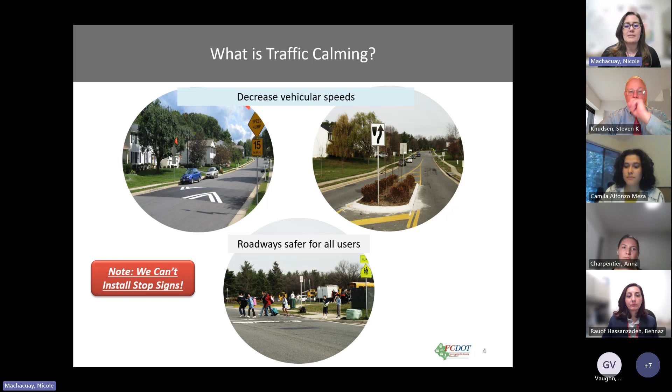Here we have a countywide map showing that within traffic calming, we have over 200 projects resulting in 500 devices countywide. Every district has devices, and the chances that you have driven over one are pretty high.

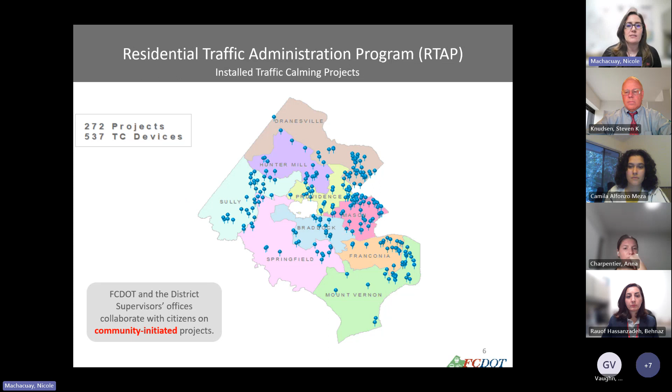The program can be broken into 5 steps. Step 1 is project initiation. Step 2 is plan development. Step 3 is community engagement. Step 4 is the ballot phase. And step 5, the final step, is project installation.

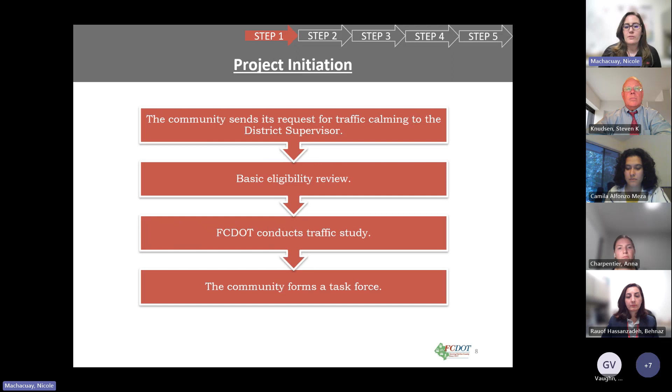As I mentioned earlier, all traffic calming projects are always community initiated. The process begins with a request from the community to the supervisor's office. Once the request is received, we will first complete an eligibility review. Next, we'll conduct a traffic study. Once it passes both the eligibility review and the traffic study, the community will then form a task force.

There are eligibility requirements that need to be met. Number 1, it needs to be a VDOT maintained road. Number 2, it needs to have a 25-mile-per-hour speed limit and be functionally classified as local, collector, or arterial. And if it's collector or arterial, it needs to meet a residential street.

There is also a traffic study component. Here we have traffic study results for Forestville Drive. For the volume criteria, we need between 500 to 6,000 vehicles in 24 hours, both directions combined. For this project, we had 543, so we met the volume criteria.

For speed criteria, the 85th percentile of speed needs to be greater than or equal to 35 miles per hour. This means that 15% of vehicles need to be traveling 35 miles per hour or faster in at least one direction of travel. On Forestville Drive, we found 39 in the northbound lane and 40 in the southbound lane, which means Forestville Drive met the speed criteria as well.

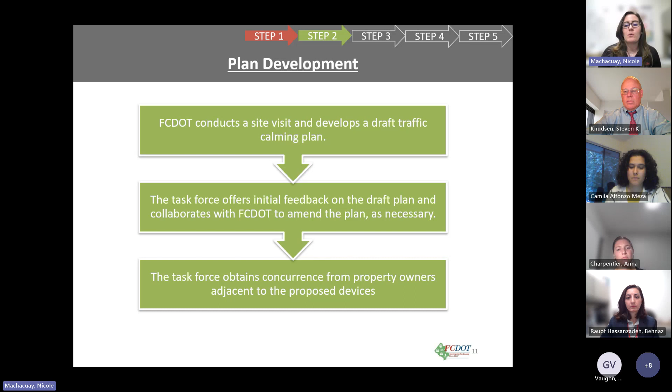Plan development is the second step. First, we will conduct a site visit in the field in order to develop a draft plan. Once we have a draft plan, we will meet with the task force to get feedback and then amend the plan if necessary. Once the task force is satisfied with the draft plan, homeowners directly adjacent to any proposed measures will need to sign off on the placement of the device for the next step to happen.

Here we have device placement requirements. Based on the guidelines, we need a minimum of 300 feet between measures and existing stopping conditions. We need a minimum of 150 feet from any intersection, a minimum of 150 feet for adequate sight distance with any device, and it needs to fit on the existing roadway. So we need to take into account any driveways, manholes, or utilities, and we also need to account for the grade of the road.

Based on those requirements, we were able to draft a plan and propose 2 speed humps and 1 speed table, as you can see on the map here. Once again, the addresses listed are the ones that signed off on the devices because they are adjacent to their homes.

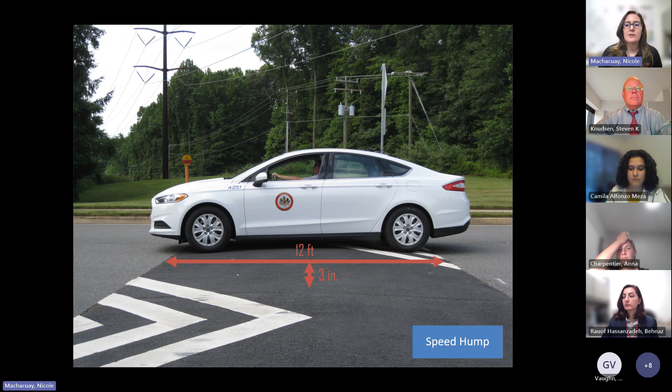Okay, so here we have a graphic of a speed hump. It's going to be 12 feet long and 3 inches at center. In addition to the speed hump, there will be a speed hump sign and the recommended 15 mile per hour sign on each side. There will also be white chevrons on each travel lane.

Here we have a graphic of a speed table. It's going to be 22 feet long versus the 12 feet of a speed hump, and 3 inches high at center. In addition to that, there will be a speed hump sign and the recommended speed of 15 miles per hour on each side. There will also be 2 white chevrons in each travel lane.

Okay, so step 3 is a community meeting, which is where we are here today. This is where we present the plan to the community to obtain feedback. Based on the feedback, the task force will decide whether they want to amend the plan or proceed to the next step. If the task force decides to move forward, we can move forward to the ballot phase.

Each household in the ballot area will receive 1 vote. They will need to send it directly to the supervisor's office. The ballot period will be open for a minimum of 3 weeks, and the supervisor's office will tally the votes and notify the task force of results.

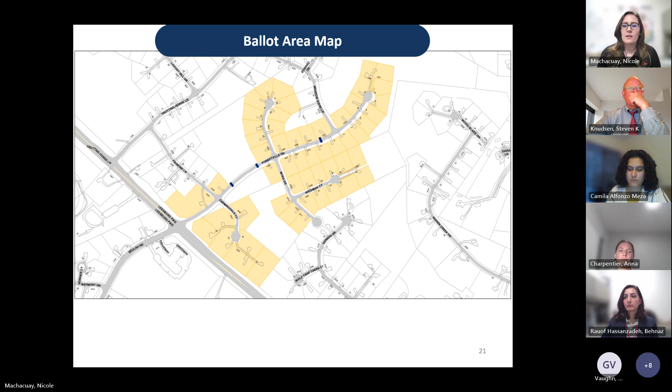Here we have the ballot area map for Forestville Drive. So there are 54 ballots. In order for the proposed plan to move forward, we will need greater than 50% of all households to vote in favor, so we will need a total of 28 yes votes.

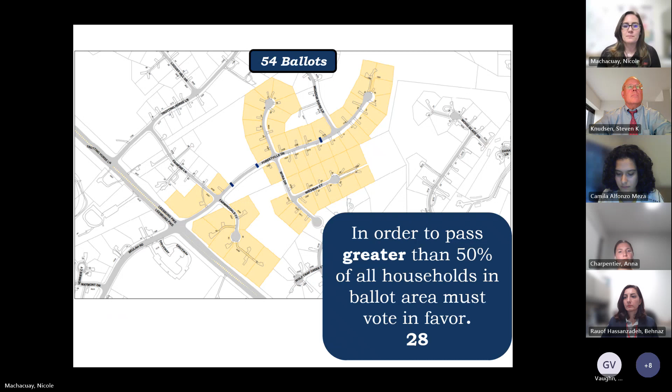If we get the required number of yes votes, we can move on to step 5, which is project installation, the final step. So the traffic calming plan will be presented to the Fairfax County Board of Supervisors for endorsement. Then that resolution will be sent to VDOT. VDOT will work with the Department of Public Works and Environmental Services to schedule installation. And finally, the traffic measures on the plan will be installed.

And here is the end of the presentation.

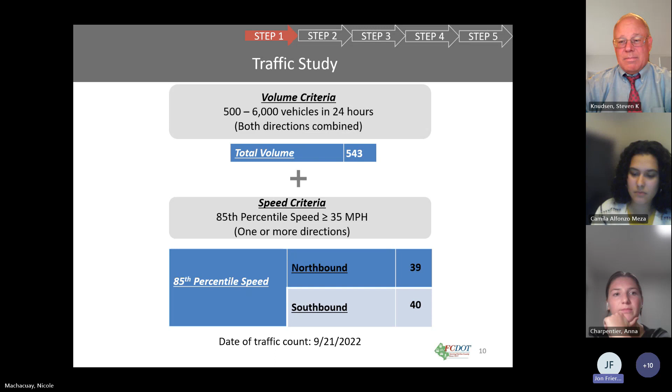First of all, I want to comment on the thing we've been talking about. I've lived here 30 years, and most of those years there have been clear speed limit signs on these roads. I was a little surprised to hear that only 40% of the people are speeding over 35, because people have been speeding through this neighborhood for decades. So I don't think taking the sign down or putting another one up is going to make much of a difference.

But my original question was, is there any sort of follow-up thing? I know that people in this neighborhood don't always respond to requests. Is there just the one mailing, or is there any kind of follow-up or reaction?

When the ballots go out, we'll generally leave that ballot process open for approximately 3 weeks. You can reach out to the supervisor's office, and Camila should be able to tell you how many have come in. Then it would be something the task force would need to do, to send out a reminder to the people that received ballots that they still need to vote. We can't necessarily let you know what addresses we've received ballots from, but we can tell you the total that we've gotten back. So if it seems like the return is lagging, you can send out some kind of communication asking people to participate if they have it. Okay, that sounds great. Thank you.

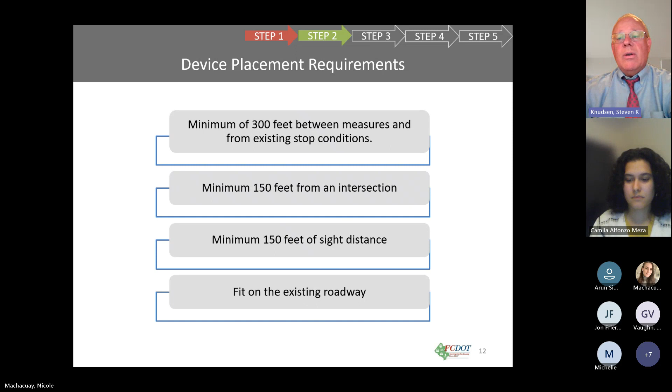All right, thank you, Arun. We were looking at the area between Farmingdale and Route 7. Unfortunately, we didn't have a long enough length of roadway to propose any measures in that area. I think when Nicole was going through her presentation, she touched on the requirements that we have in the program—we have distances from the traffic signal that we need to be at Leesburg Pike, and also from the intersection of Farmingdale Court, and we just didn't have enough room to propose anything in that area. So we would have preferred to address something there, but we just didn't have the space.

Okay. Yeah, please revisit that, see if there's any measure that can be taken, because I'm sure you'll hear that from other members of the community that have experienced that kind of dangerous cornering. Okay, all right, thank you.

Okay, and Bridget, I see that you've written in your question. Bridget asks, what date will the ballots be going out to the community? Well, that hasn't been determined yet. We're still waiting to finish the meeting tonight and see if the task force wants to move forward with this. If they do, then we'll send out the material that will need to be modified. It's up to the task force to make some modifications to the material so it reflects the project we're working on here. We would then okay that the changes they made conform to the requirements we have for this process. Once that happens, they would make a determination on when they think they can produce the ballots and send them out. So I would anticipate that if the task force wants to move forward with this, the ballots would probably be going out sometime at the end of September or the beginning of October, but that's just kind of an estimate. That should be doable if they want to move forward.

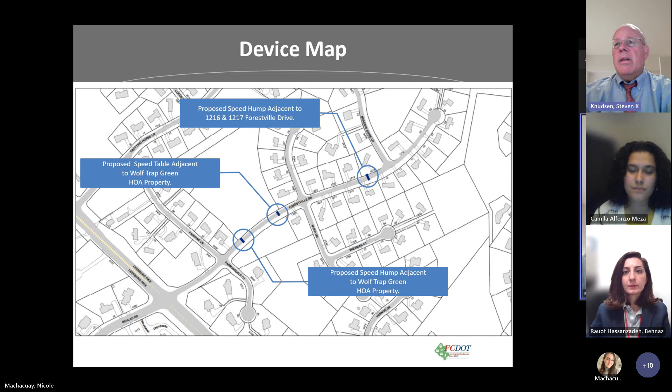Yeah, obviously Vernon Drive is the closest to Forestville. I think it's a speed hump at that location. Yes, it's a speed hump. I do believe there are some speed tables down on Carper's Farm Way, a little further out on Route 7, on the south side, that community members can go down and drive over to see what the speed table is like. Those are a little bit older, they've been in place for a number of years. The Vernon Drive and Bellevue installations are more recent.

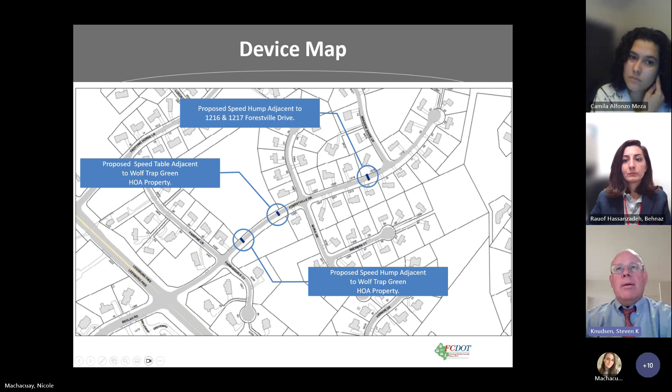Yes, correct. And also Patrice asks, won't this just push a lot of traffic to Trotting Horse? So, we're not really seeing too much displaced traffic from our devices. It is a possibility. We did study Trotting Horse quite a few years ago, and I don't think they were successful when they went through the ballot process. I don't remember if they actually made it to a ballot process or just didn't get to that community meeting stage. But I don't think we're going to be pushing too much traffic down to Trotting Horse. It's mostly going to hopefully address the traffic that's flowing through on Forestville now.

Okay, and Patrice also states — so no worry, Patrice, if you came in late, I went ahead and put up the schematic for a speed table. So a speed table is going to be a little bit longer than a speed hump. A speed table is 22 feet long and 3 inches at center, and the speed hump is going to be 12 feet long and 3 inches at center as well.

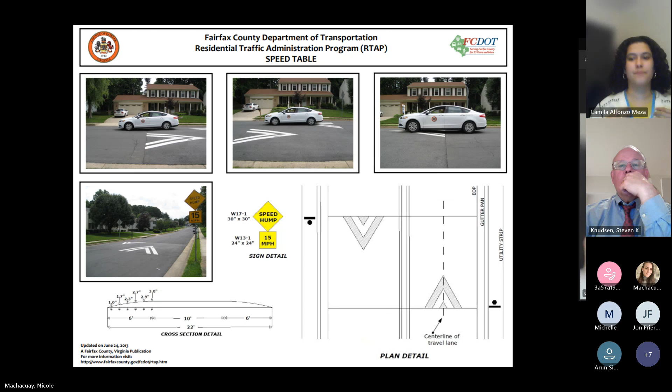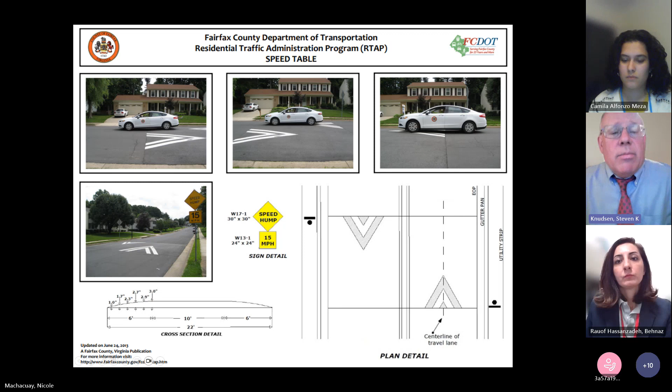Can you also please clarify with the speed humps, do they have signs either side of the humps? They do, and I believe Nicole has the schematic up on the screen right now. So you're going to have a speed hump sign with a 15-mile-an-hour recommended placard below it—that kind of sign configuration is on the screen, facing in both directions.

Okay, thank you. Another example in the neighborhood, a little further out off Georgetown Pike, is Kimberwick. I think they have a similar configuration to what we're looking at, just for those on the call to consider. Yes, Kimberwick does have two new speed humps and a raised crosswalk that's been in place for a number of years.

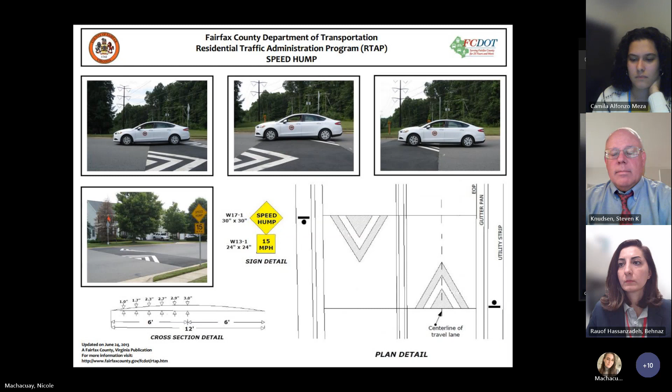Nicole has put up on the screen contact information for our office. If you have a question concerning the Forestville Drive traffic calming project, you can email us at dotinfo@fairfaxcounty.gov and put Forestville Drive traffic calming in the subject line. The phone number is 703-877-5600, and you can ask to talk to somebody about the project.

You can also reach out to the Dranesville District Supervisor's Office. Their email is drainsville@fairfaxcounty.gov, and you would put the same subject line, Forestville Drive traffic calming. Or you can call 703-356-0551 and ask to talk to somebody about the project, and you'll most likely be directed to Camila.

It looks like we have a remark written in from Scott. Scott says, remark on the 25 mile per hour signage, the Beltway has 55 miles per hour, but do most drivers really obey the speed limit? I'm assuming that's a rhetorical question, but I would assume most people do not obey most posted speed limits. That's why we have physical devices to help remind people they should drive a little slower on a residential roadway.

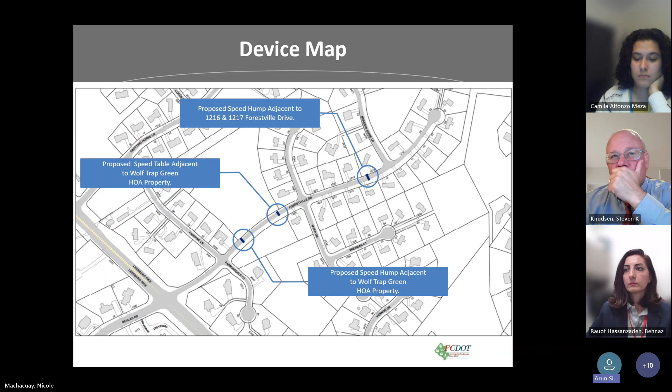People who are driving from the cul-de-sac at the end of Forestville Drive and coming onto Route 7, they literally come out as bullets coming out of a shotgun, especially if the traffic light is green. So we need a speed bump to reduce that. It's the same the other way, people coming from Route 7 are picking up speed, but I am more concerned about people coming towards the Route 7 intersection to reach that traffic light. We always see cars coming very fast. So would you please consider that?

So we did put one on the far side of that intersection, as close to that intersection as our criteria allow. It's about 150 feet from that proposed speed hump to the intersection you're concerned about. Unfortunately, through our program, we are not able to place them any closer than where we've proposed that first measure. We do have a setback distance from intersections, and that distance is 150 feet. I think we're right at about 150 feet to the center of that first device.

So we looked at it, we got it as close to that intersection as we possibly could. We wanted to start slowing down the traffic as soon as we can coming off of Route 7, and also as they approach Route 7. As you said, they do approach it rather fast, especially if they're seeing a green light. So that is placed as close to that intersection as we can get it, given the requirements we have for the program.

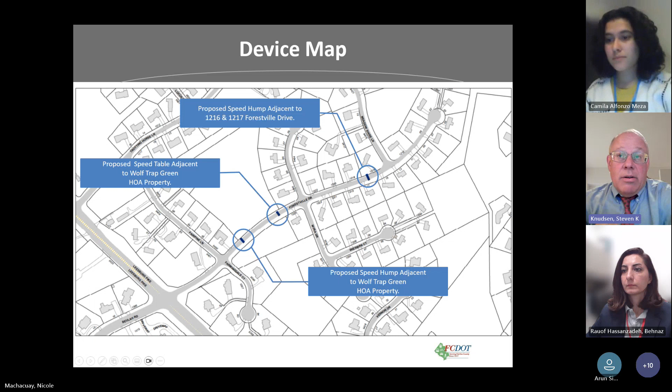So it's not the same 150 that we heard we need. If it's 150 from Route 7 and 150 feet from Farmingdale Court, that would work. Correct, but because of the traffic signal, we need 300 feet from that traffic signal. So we do need additional distance as a setback from a stop condition, as Nicole had pointed out earlier. From a stop sign or a traffic signal, we need 300 feet of road length before we can start proposing devices. And we just don't have that road length between those two intersections to fit one in there.

Gotcha, okay. If there is any way, if you have a different approach, please consider that. But I think I've made my case. And if you find another alternative, you'll consider that. Thank you. Okay, all right. Thank you.

Okay, thank you. We do also have a written question here from Bridget. She asks: who has determined the device placement requirements, statute, VDOT?

So it's kind of a combination. VDOT does have their spacing requirements, and we've kind of built ours off of their spacing requirements. VDOT in their policy asks or says that they need to see 200 feet away from an intersection. We've reduced that down to 150 feet, and that is their primary spacing requirement. They don't really acknowledge distances away from stop conditions, but we do have that in the county's requirements for the program, for our policy and procedures. So it was kind of like a combination.